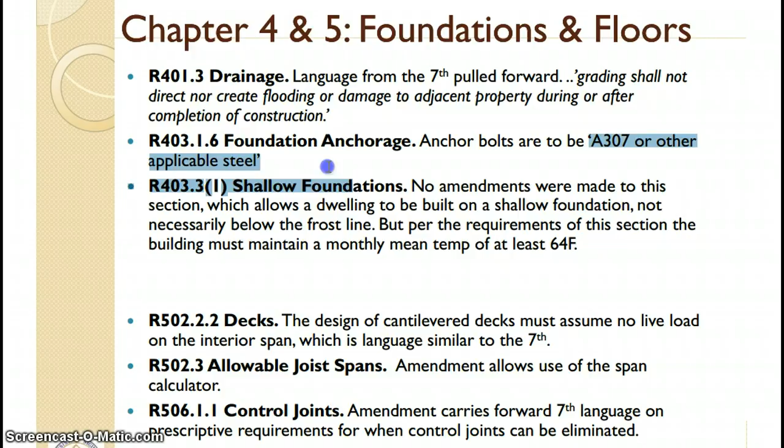Foundation anchorage. Anchor bolts are to be A307 or other applicable steel. So this is something you need to highlight so you know where to find it.

Shallow foundations, perhaps in the code book, not in here or on here if you choose. No amendments were made to this section, which allows the dwelling to be built on a shallow foundation, not necessarily below the frost line, but per the requirements of this section, the building must maintain a monthly mean temp of at least 64 F.

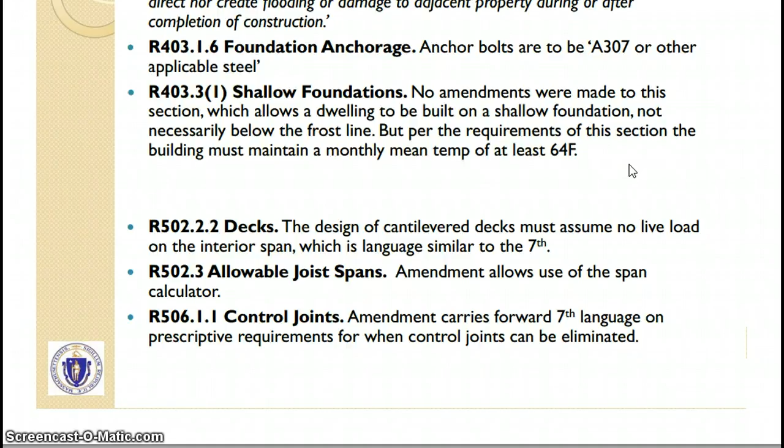Decks. The design of cantilever decks must assume no live load on the interior span, similar to the 7th edition. Allowable joist span.

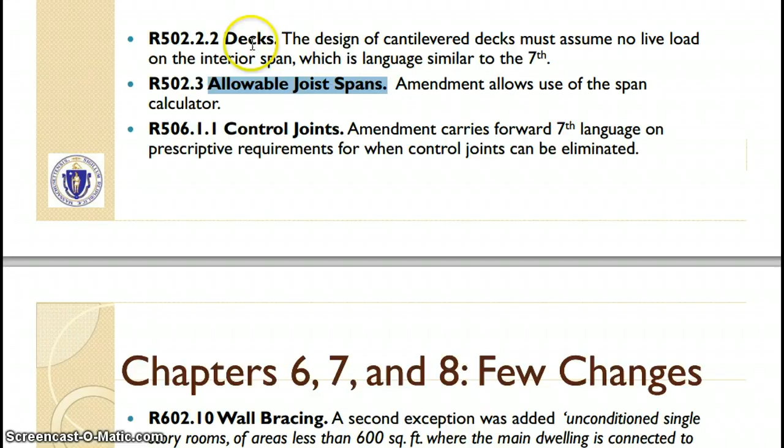Amendment allows use of the span calculator for joist span of decking. Control joints.

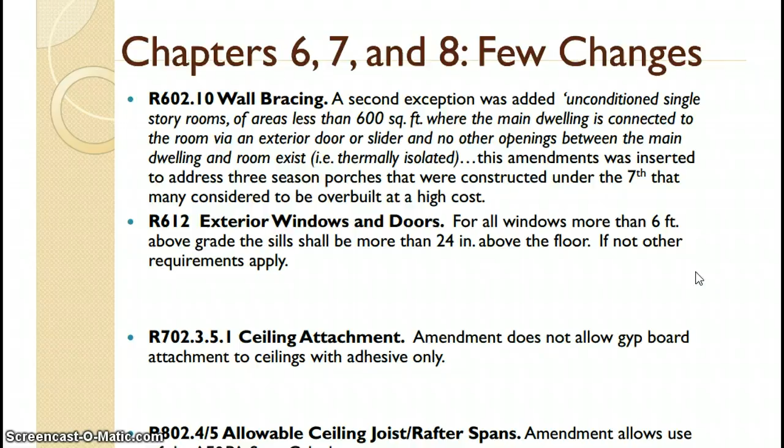Amendment carries forward 7th edition language on prescriptive requirements for when control joints can be eliminated. Chapter 6, 7, and 8 have very few changes. Wall bracing.

A second exception was added: unconditioned single-story rooms of areas less than 600 square feet where the main dwelling is connected to the room via an exterior door or a slider, and no other openings between the main dwelling and the room exist, and the room is thermally isolated. This amendment was inserted to address 3-season porches that were constructed under the 7th that many consider to be overbuilt at a high cost.

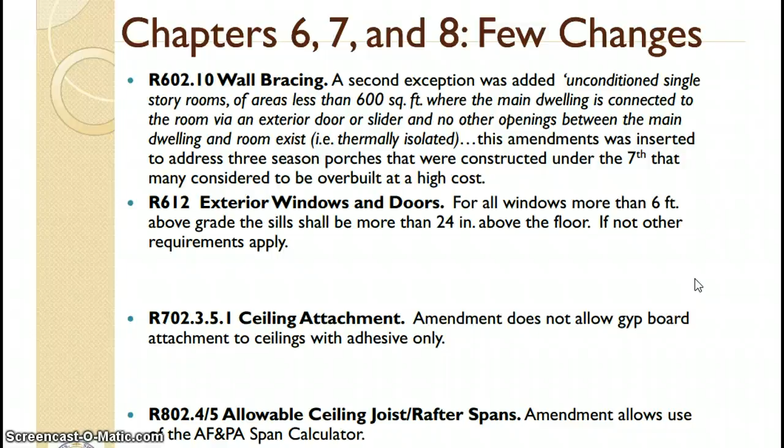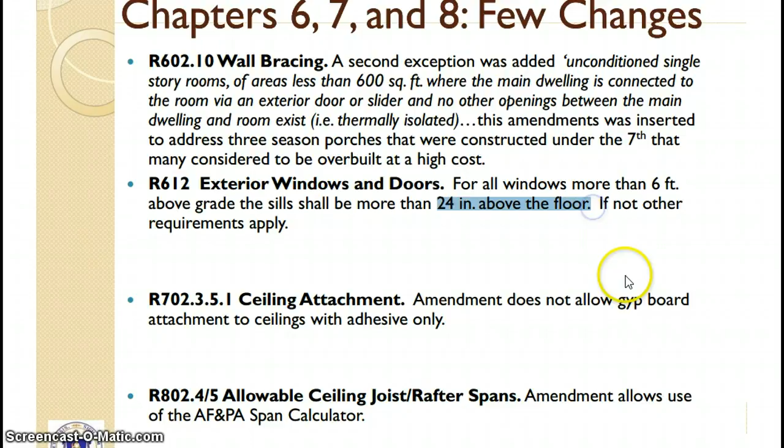Exterior windows and doors. For all windows more than 6 feet above grade, a sill shall be more than 24 inches above the floor. If not, other requirements apply.

Ceiling attachment. Amendment does not allow gypsum board attachment to ceilings with adhesives only.

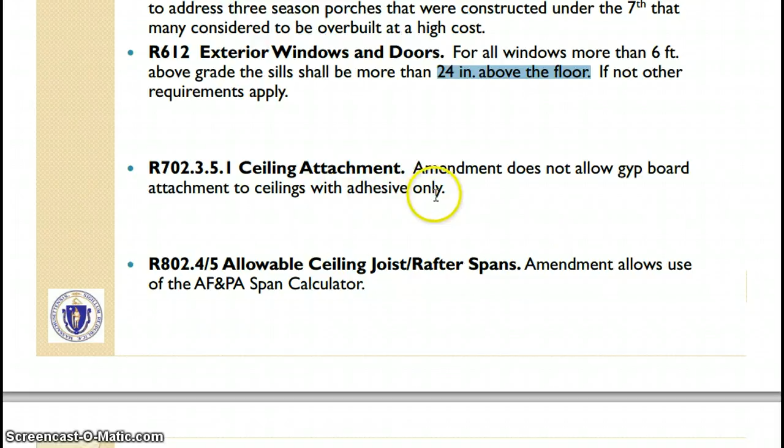Allowable ceiling joist rafter spans. Amendment allows use of AF and PA span calculator.

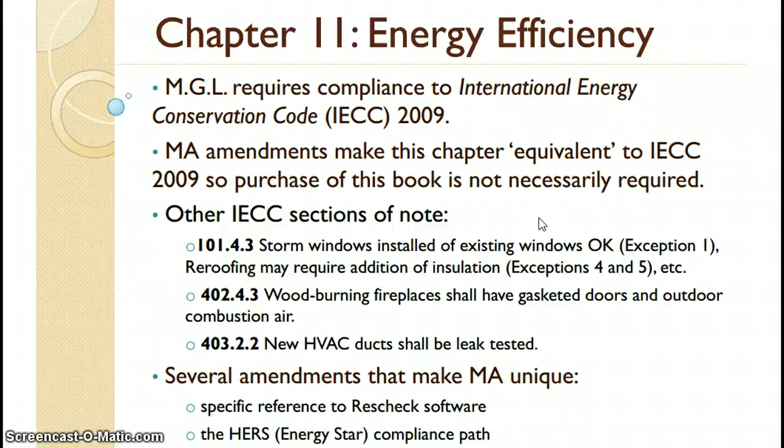Chapter 11 on energy efficiency. Massachusetts general law requires compliance to the International Energy Conservation Code, the IECC 2009.

Massachusetts amendments make this chapter equivalent to IECC, so purchasing that book is not necessarily required. Just use the Massachusetts code book. Other IECC sections of note.

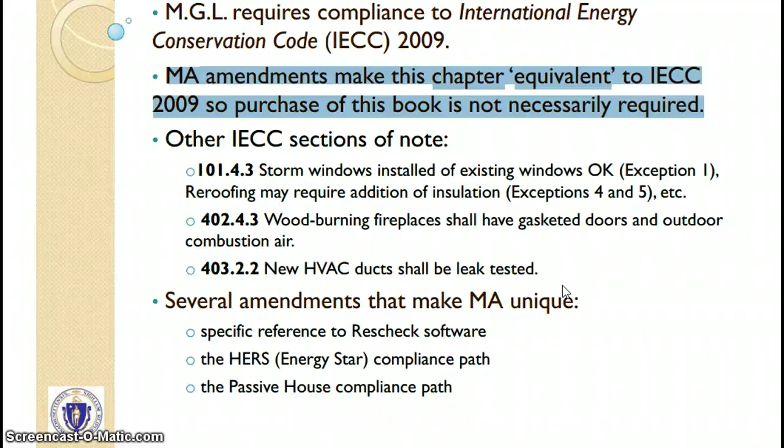Storm windows installed on existing windows are okay. Roofing may require addition of insulation. Wood burning fireplaces shall have gasketed doors and outdoor combustion air. New HVAC ducts shall be leak tested.

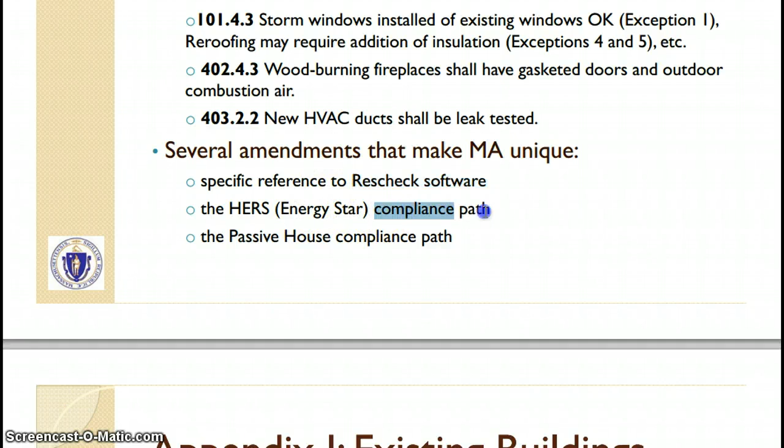Several amendments make Massachusetts unique, with specific reference to ResCheck software, Energy Star compliance path, and Passive House compliance path, and Appendix J.

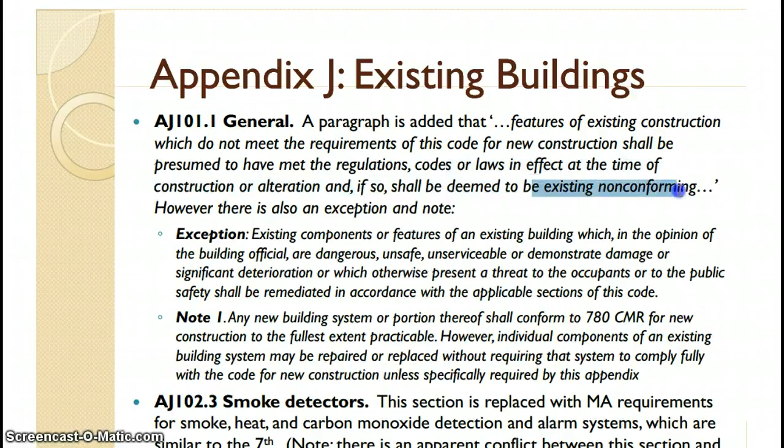Existing buildings. In general, a paragraph is added stating that features of existing construction which do not meet the requirements of this code for new construction shall be presumed to have met the regulations, codes, or laws in effect at the time of construction or alteration, and if so, shall be deemed existing nonconforming, meaning something similar to code compliance.

However, there is also an exception to note: existing components or features of an existing building which, in the opinion of the building official, are dangerous, unsafe, unserviceable, or demonstrate damage or significant deterioration, or which otherwise present a threat to the occupants or to public safety, shall be remediated in accordance with the applicable sections of this code.

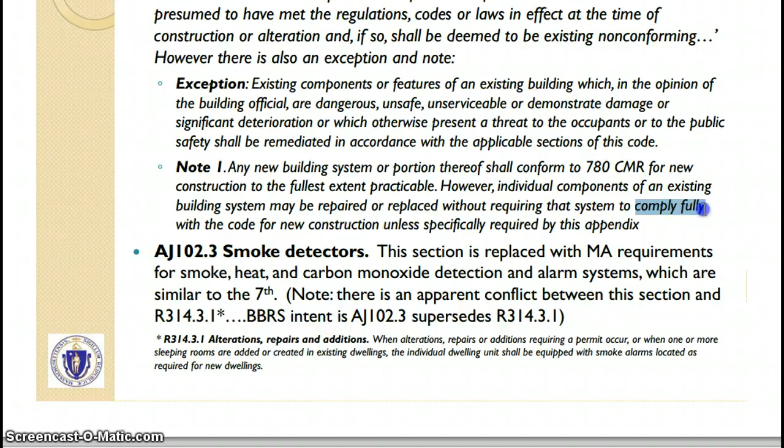Any new building system or portion thereof shall conform to code for new construction to the fullest extent practicable. However, individual components of an existing building system may be repaired or replaced without requiring that system to comply fully with the code for new construction, unless specifically required by this appendix.

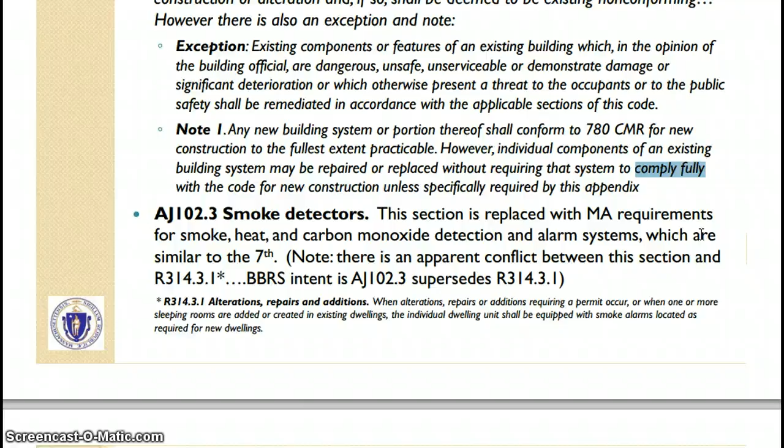Smoke detectors. This section is replaced with Massachusetts requirements for smoke, heat, and carbon monoxide detection and alarm systems, similar to the 7th. There is an apparent conflict between this section and R314.3.1. BBRS intent is that AJ102.3 supersedes R314.3.1.

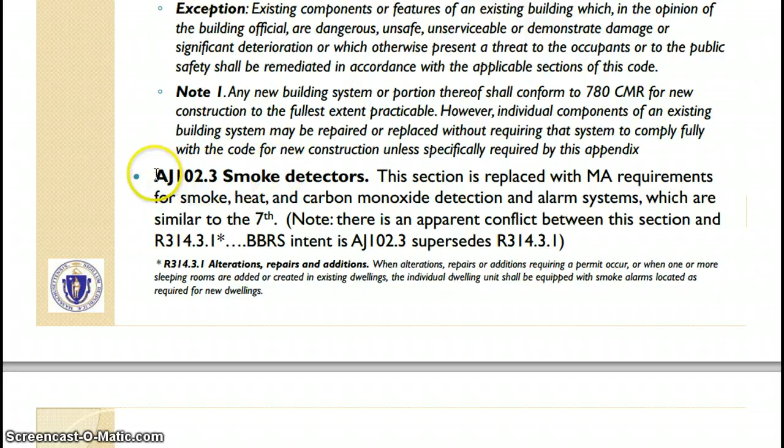This is the note about that section regarding alteration repairs, but that's okay—just disregard this because this will supersede that. So you just have to follow this, not this small print right here.

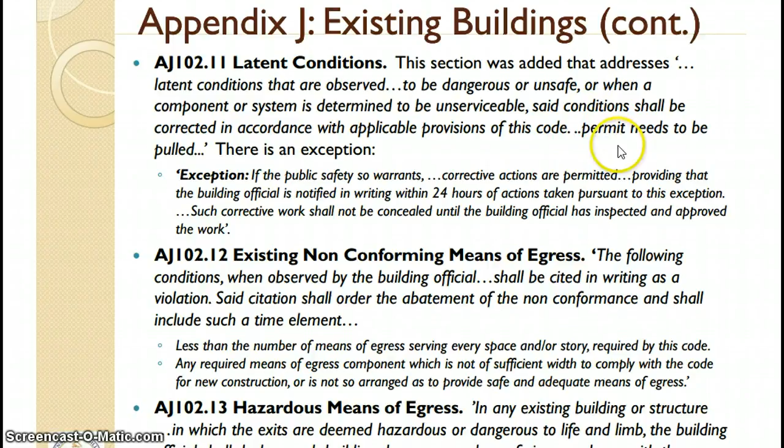A permit needs to be pulled. There is an exception: if public safety so warrants, corrective actions are permitted, providing that the building official is notified within 24 hours of actions taken pursuant to this exception. Such corrective work should not be concealed until the building official has inspected and approved the work. So if there is an emergency during vacation weekends, for example, that may be done, but leave it open for inspection.

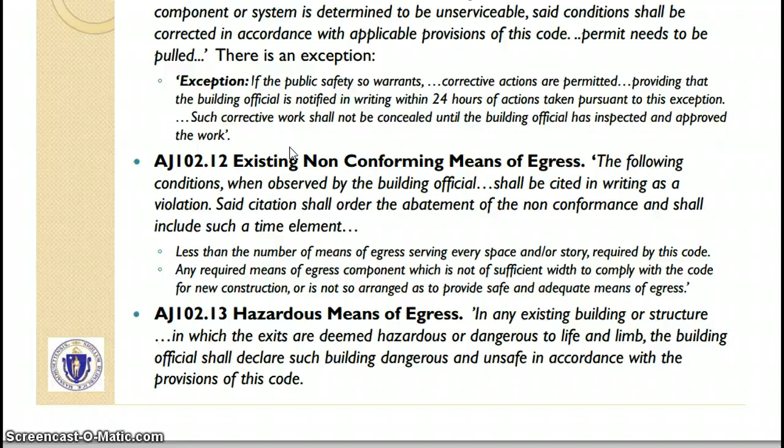AJ 102.12, existing non-conforming means of egress. When observed by the building official, the following conditions shall be cited in writing as a violation. Said citation shall order the abatement of the non-conformance and shall include a time element, a time limit for what needs to be corrected.

This includes less than the number of means of egress serving every space or story required by this code, or any required means of egress component which is not of sufficient width, such as less than 32 inches for a main door, to comply with the code for new construction, or is not so arranged as to provide safe and adequate means of egress.

Hazardous means of egress. In any existing building or structure in which the exits are deemed hazardous or dangerous to life and limb, the building official shall declare such building dangerous and unsafe in accordance with the provisions of this code.

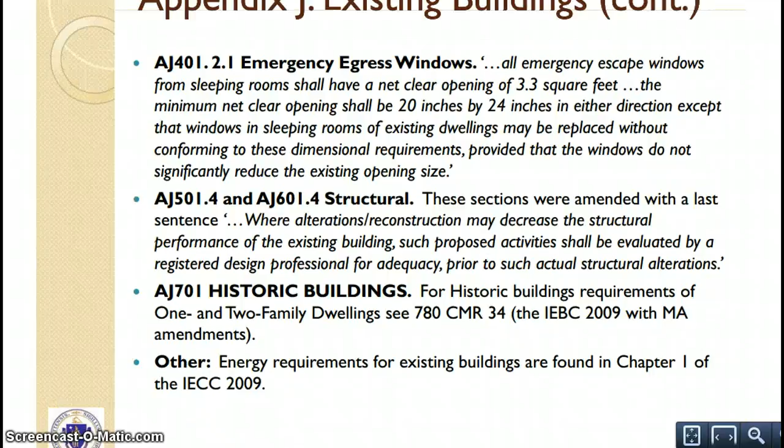Appendix J, existing buildings, continued. All emergency escape windows from sleeping rooms shall have a net clear opening of 3.3 square feet. The minimum net clear opening shall be 20 inches by 24 inches in either direction, except that windows in sleeping rooms of existing dwellings may be replaced without conforming to these dimensional requirements, provided the windows do not significantly reduce the existing opening size.

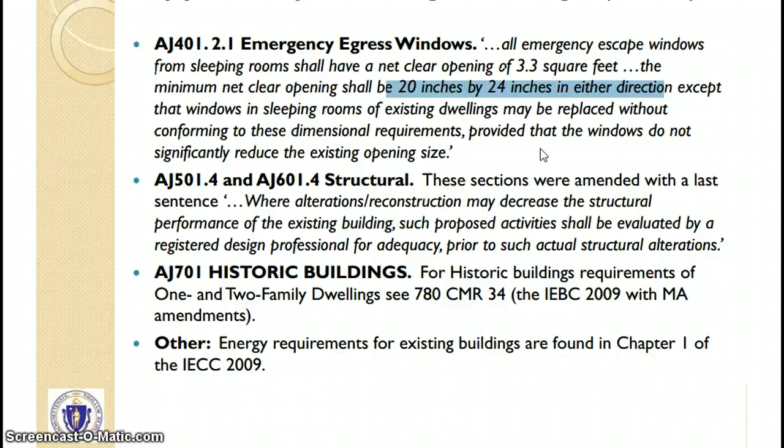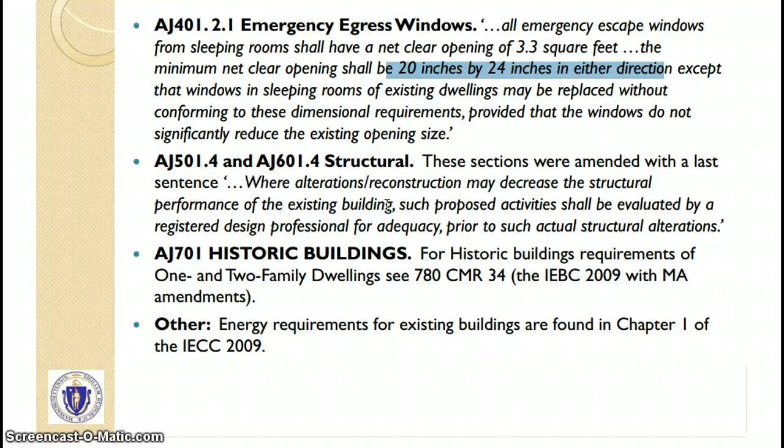Structural. These sections were amended with a last sentence stating where alterations or reconstruction may decrease or reduce the structural performance of the existing building, such proposed activities shall be evaluated by a registered design professional for adequacy prior to the actual structural alterations.

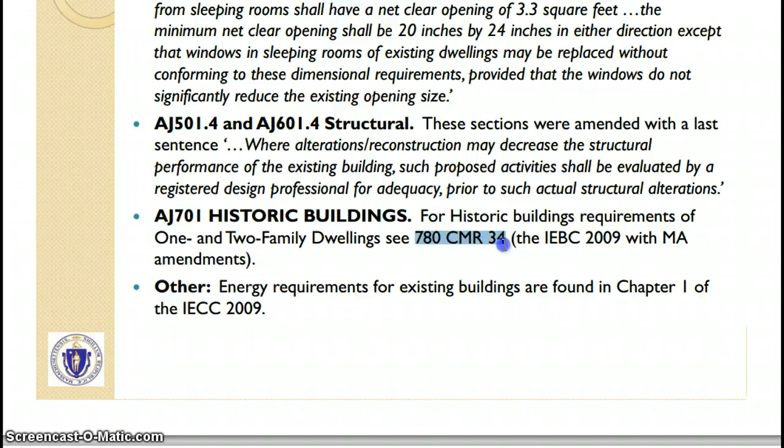Historic building. For historic buildings, see 780 CMR 34, or the IEBC 2009 with the amendments.

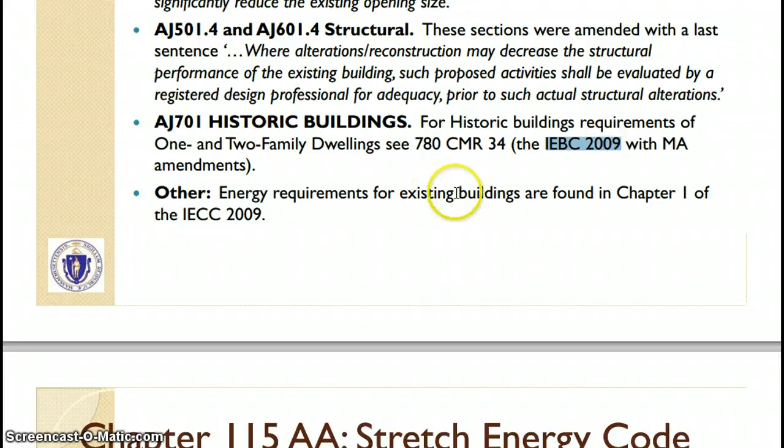Energy requirements for existing buildings are found in Chapter 1 of the IECC.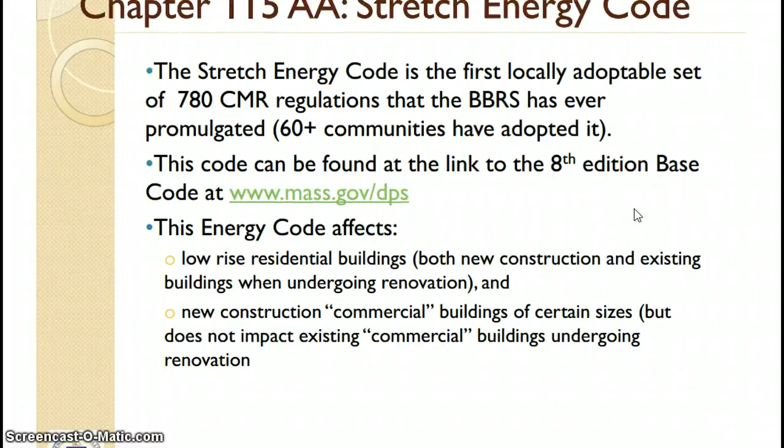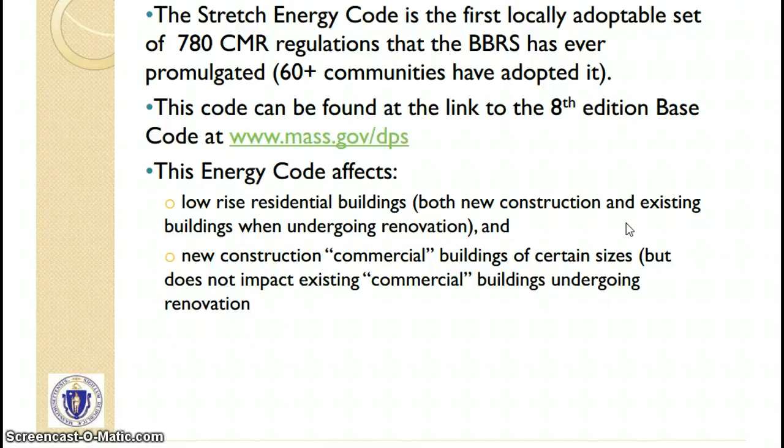Stretch Energy Code. The Stretch Energy Code is the first locally adoptable set of 780 CMR regulations that the BBRS has ever promulgated. 60 plus communities have adopted it. This code can be found at the link to the 8th edition base code. This energy code affects low-rise residential buildings, both new construction and existing buildings undergoing renovation, and new construction commercial buildings of certain sizes, but does not impact existing commercial buildings undergoing renovation.

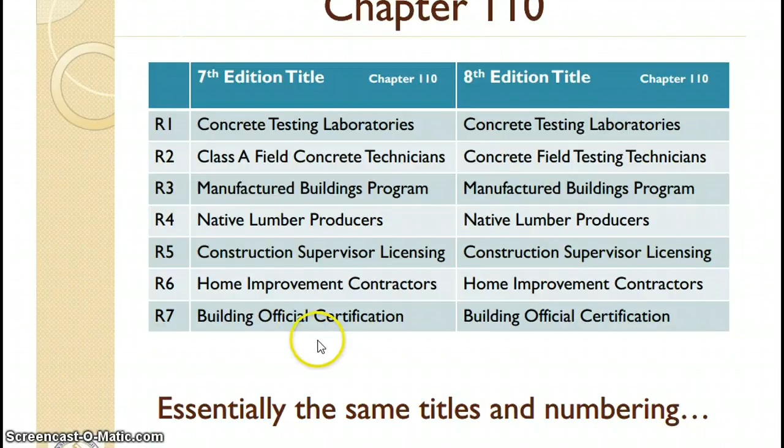Stretch code, Chapter 110, the 7th and the 8th edition. The content and names are pretty much the same.

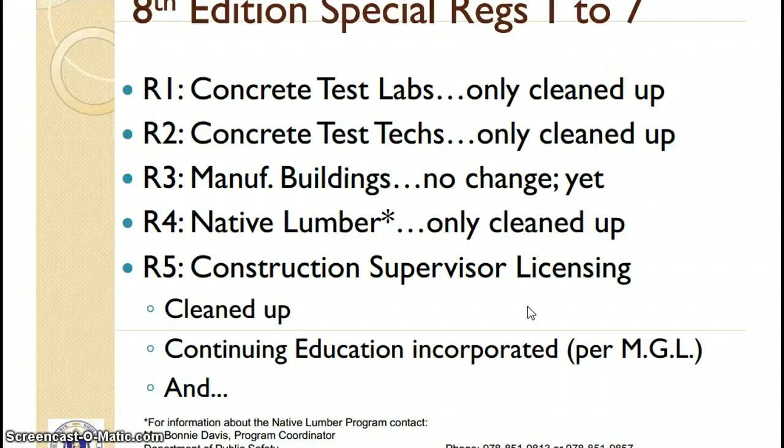8th edition special regulations 1 through 7. Concrete test labs, only cleanup. Concrete test techs, only cleanup. Manufactured buildings, no change. Native lumber, only cleanup. Construction supervisor license, cleanup. Continuing education incorporated, cleanup, maybe revised.

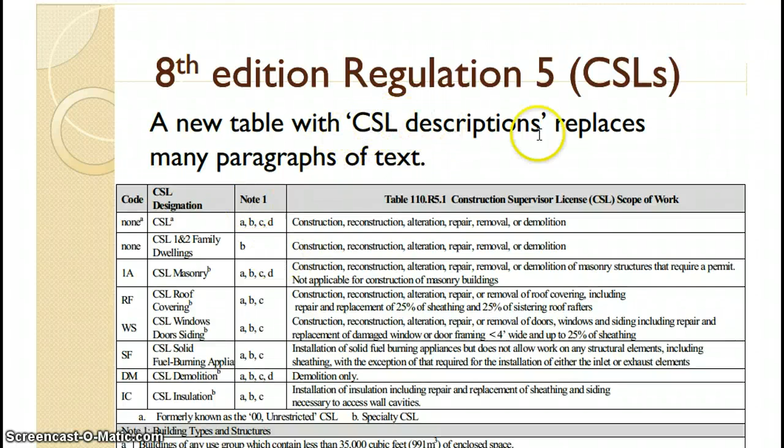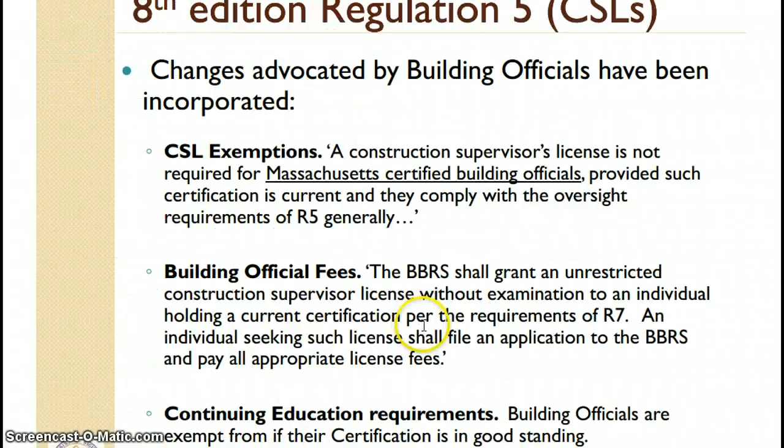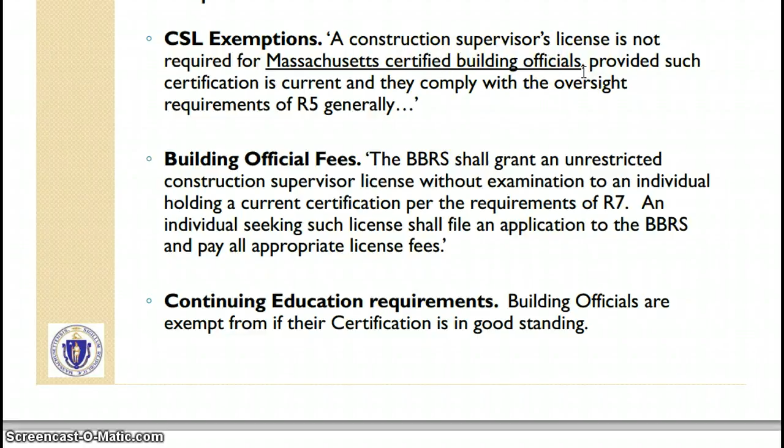CSL exemptions. A construction supervisor's license is not required for Massachusetts certified building officials, provided such certification is current and they comply with the oversight requirements of R5 generally.

Building official fees. The BBRS shall grant an unrestricted construction supervisor license without examination to an individual holding a current certification per the requirements of R7. An individual seeking such a license shall file an application.

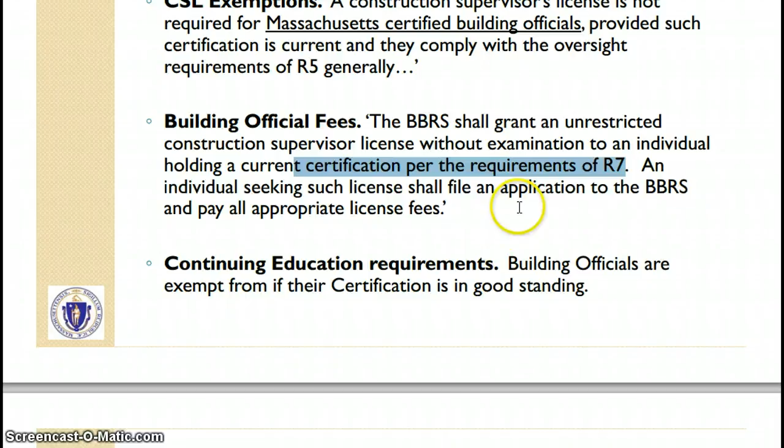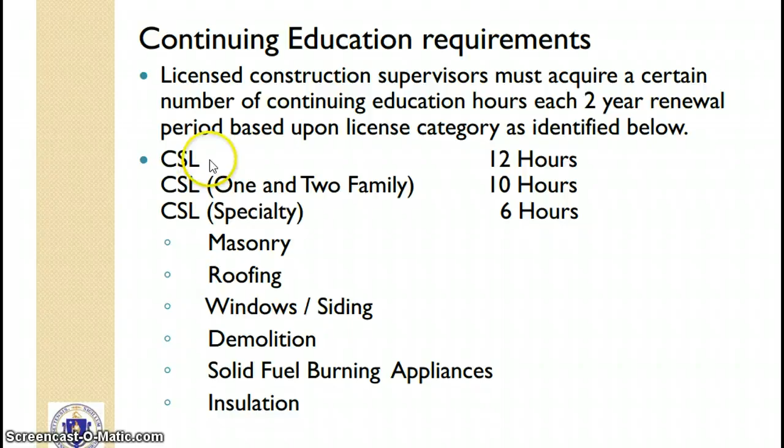Continuing education requirements. Building officials are exempt from it if their certification is in good standing. Continuing education requirements for licensed construction supervisors require a certain number of continuing education hours each 2-year renewal period, based on what's identified below.

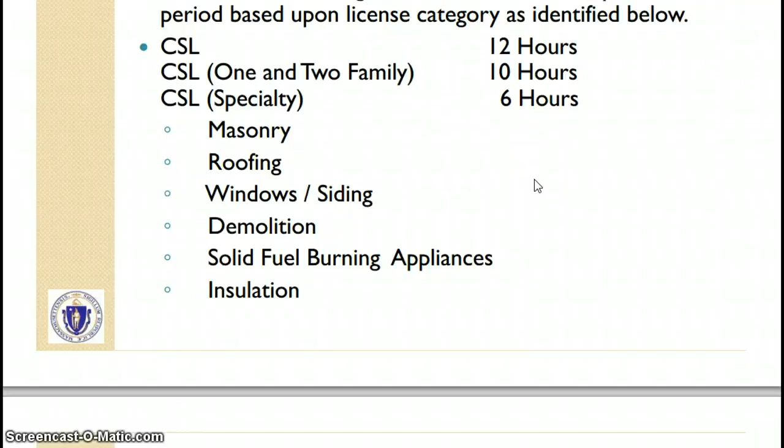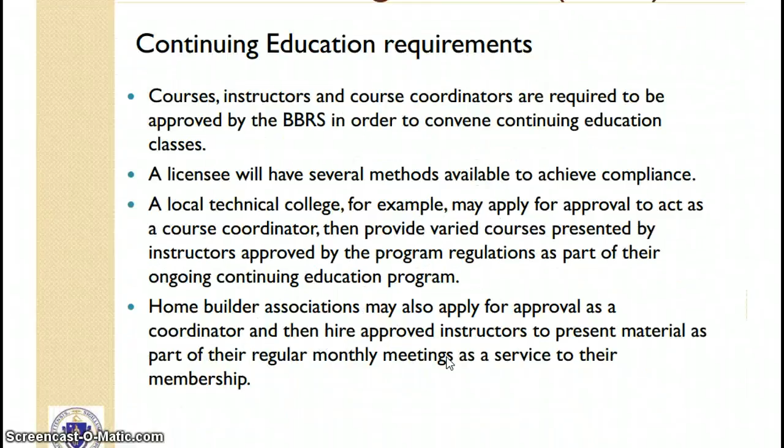A licensee will have several methods available to achieve compliance. A local technical college may apply for approval to act as a course coordinator and provide varied courses presented by instructors approved under the program regulations.

Home builder associations may also apply for approval as a coordinator and then hire approved instructors to present materials as part of their regular monthly meetings as a service to their membership.